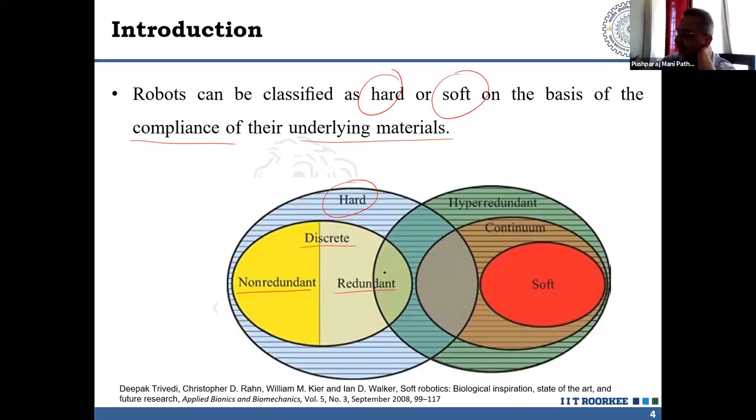To introduce this concept, I first have to define degrees of freedom. When we are talking about robotics, the first and foremost thing that appears is the degrees of freedom. It is the number of independent variables needed to specify the position and orientation of an object in space. I'm talking about the general degree of freedom.

For example, say there is an object in space. If I want to specify this object, the specification can be with respect to a coordinate system, say an XYZ coordinate system. With respect to this coordinate system, I can specify the position using the CG of this object, so I have three variables: XCG, YCG, and ZCG.

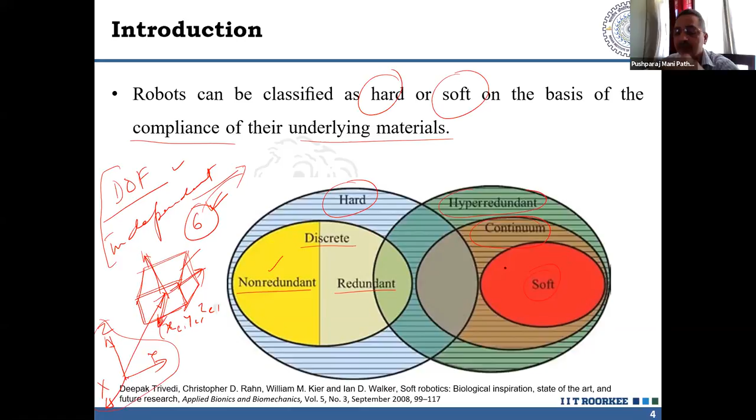This figure will give you a little more idea. Suppose I have a robot with just 2 links. I have a motor attached here to drive this link, and a motor attached here to drive this link—so I have a 2-link manipulator. Now when I actuate these joints, these may be the trajectories you are seeing, the possible positions.

Now I increase the number of links. So this is my first link, second link, third link, fourth link, and this is my fifth link—I've increased the number of joints. You can see that the motion of the robot has become serpentine. And if I increase the number of links to a very large value, the shape the robot gets is something like a continuum robot.

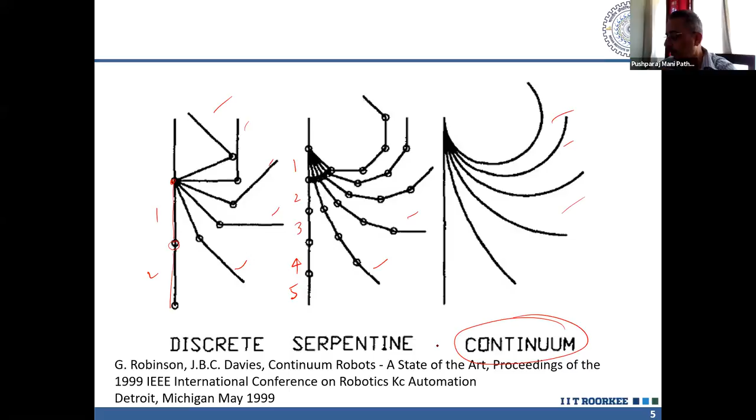So this is how, by increasing the number of links, the things evolve—we move from the discrete to the continuum domain.

A soft robot is inherently compliant and exhibits large strain in normal operation. The most commonly used hard robots are kinematically non-redundant, as I explained. These robots are typically used in well-defined environments in which they repeatedly perform prescribed motions—you might have seen such robots in workshops and industries.

Now, these hard robots are designed such that they have very large stiffness. If the stiffness is large, the deflection is going to be low. And if you want things to be accurate—the trajectory tracking of your manipulator to be accurate—you want a very small amount of deflection in the arm of the manipulator.

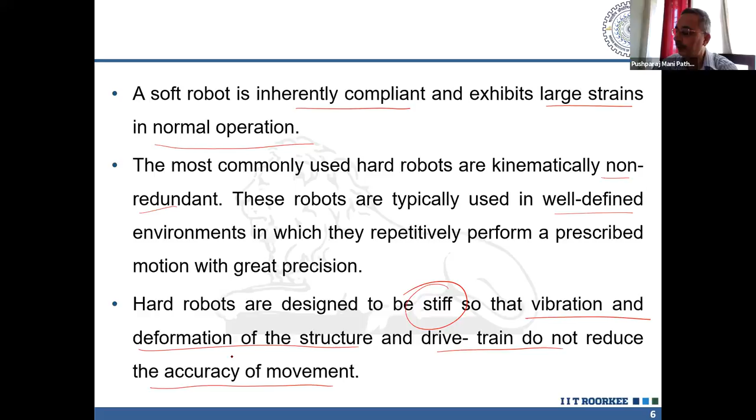Hard robots are designed to be stiff so that vibration and deformation of the structure and drivetrain do not reduce the accuracy of movement. Hard robots are hyper redundant when the number of joints is very large, and hyper redundant robots have the potential to work in unstructured environments and provide high dexterity.

You may ask why we require a hyper redundant robot. Suppose you have some obstructions, something like this. If you have a hyper redundant robot, it can overcome these obstructions. If you have more links, more configurations of the robot are possible, so these obstructions can be avoided. That is the usage of a large number of links.

I'll explain with a simple figure the capabilities of hard and soft robots. For the hard robot, if you see this figure, you have an obstacle here. If I want my manipulator's tip to reach over there, it goes in this form: this could be a joint angle, this could be another joint angle, and this another joint angle which the motor rotates to these links. Here the probability of hitting this obstacle with the robot is very large.

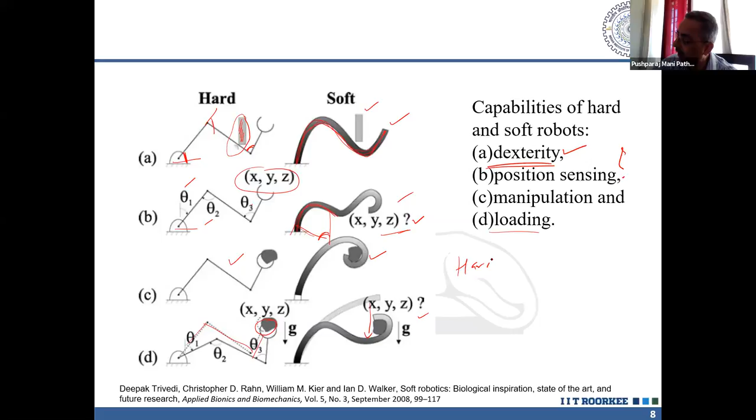The other problem is that of loading. In case of a hard manipulator, if there is a payload taken by the end effector, there is going to be a certain amount of displacement in the manipulator, so the links may move from here to some other configuration because of the load. But in case of a soft manipulator, this displacement is going to be large. As I said, in case of hard, stiffness is very high, and in case of soft, stiffness is low, so we are compromising on stiffness. Here accuracy is high, whereas here accuracy suffers. That is the trade-off being done.

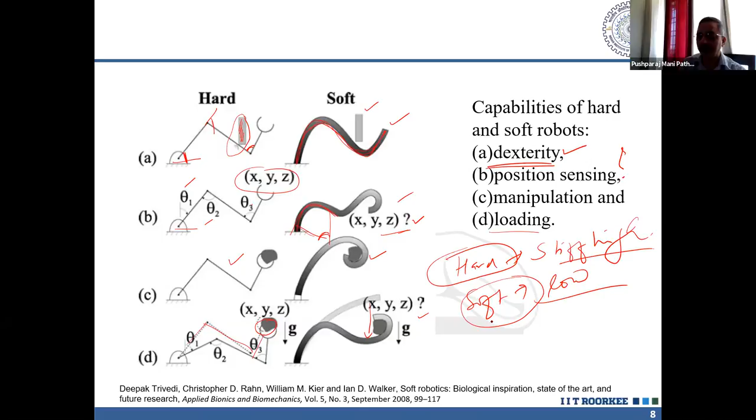Fine, I think I have explained these things, so I can skip these slides.

Soft robots have distributed deformation with theoretically an infinite number of degrees of freedom. That is there with the soft robot because their deformation is distributed. Each point, since it's made of infinite number of points theoretically, to describe those infinite points you need infinite coordinates basically.

This leads to the hyper redundant configuration space, where the robot tip can attain every point in the three-dimensional workspace with an infinite number of robot shapes and configurations.

Then the question arises: why do we go for soft robots if they don't have good accuracy? Soft robots actually have an additional feature: they generate little resistance to compressive forces, and therefore they can conform to obstacles. Conform to obstacle means if some obstacle is there, it can take its shape, it can deform. The advantage of that is they can carry soft and fragile payloads without causing damage to it.

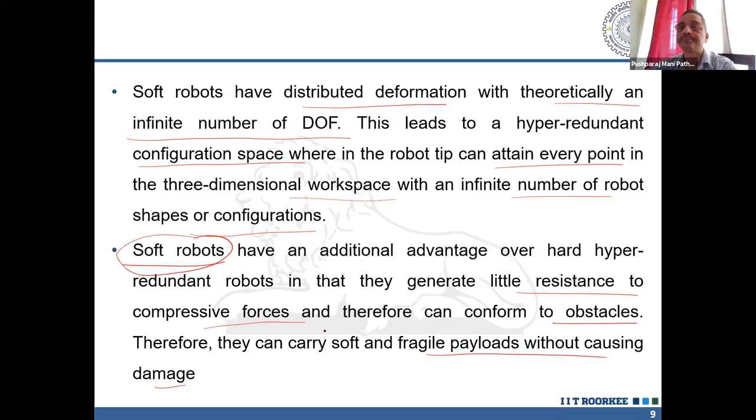The actuators of soft robots are typically integrated into and distributed throughout the structure. In case of hard robots, our actuators are actuated at the joints - we have motors fixed at the joint to actuate these joints. But in case of soft robots, they are usually pneumatically actuated, so the actuation is distributed in that case.

Often the actuators make up most of the structure. Soft robots fall into a class of systems termed under-actuated, because unlike hard robots, there is not an actuator for every degree of freedom. Other degrees of freedom may be influenced by the actuators, but many degrees of freedom are not controllable. Sensing and controlling the shape of soft robots is challenging, as I explained earlier, and since their structure is a continuum, exact measurement of shape and tip position is difficult.

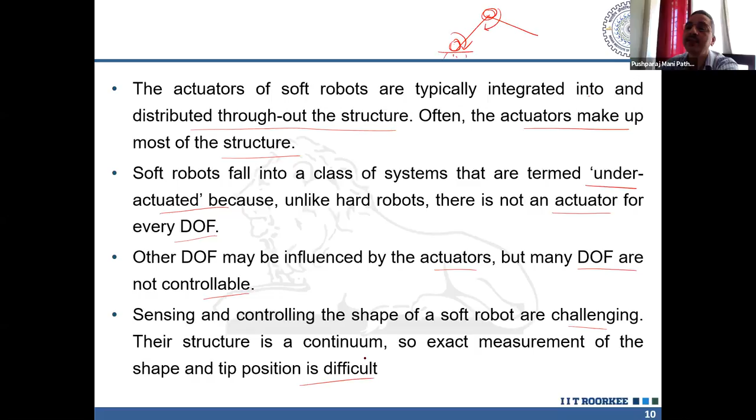Now, assuming a rigid robot, joint position can be processed by the forward kinematics. I hope all of you are aware of what is forward kinematics and what is inverse kinematics.

So, if I have a simple 2 degree of freedom planar manipulator with two links - you have a motor here fixed to the ground actuating the first link, and then a motor fixed on the first link actuating the second link. Say this angle is theta1 and this angle is theta2, and this is the tip of the manipulator, then I can find out this tip position given the joint angles.

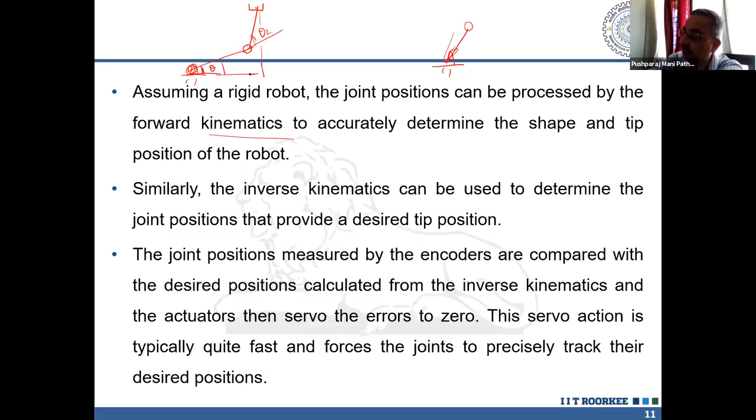As I was telling you, I can find out this angle is theta1. If this length is L1 and this length is L2, then this total angle is going to be theta1 plus theta2, because if I draw a parallel line here, this angle will also be theta1. So the x tip and y tip: x tip I can find as L1 cos theta1 plus L2 cos(theta1 plus theta2), and y tip as L1 sin theta1 plus L2 sin(theta1 plus theta2).

So what I'm saying is that forward kinematics means if you know the theta1 and theta2 values, then you can find out x tip and y tip. This is what is called forward kinematics - that for a given joint configuration, we can get the tip positions.

And what is inverse kinematics? Inverse kinematics is that you are given the x and y. Now the question is, in forward kinematics, how do I know theta1 and theta2? If you are using simple toy motors, they have a sensor called the potentiometer put into it, and with the help of the potentiometer rotation, you can find out what that joint angle is.

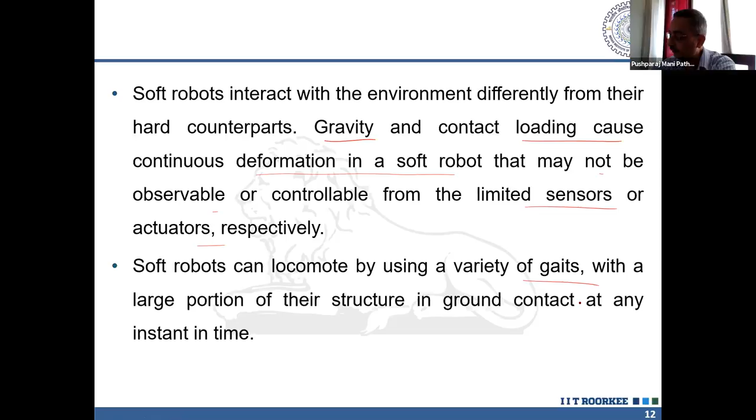With this brief introduction, I'd like to give you an overview of how people have progressed in this area of the bionic manipulator, and how they have tried to mathematically model its kinematics.

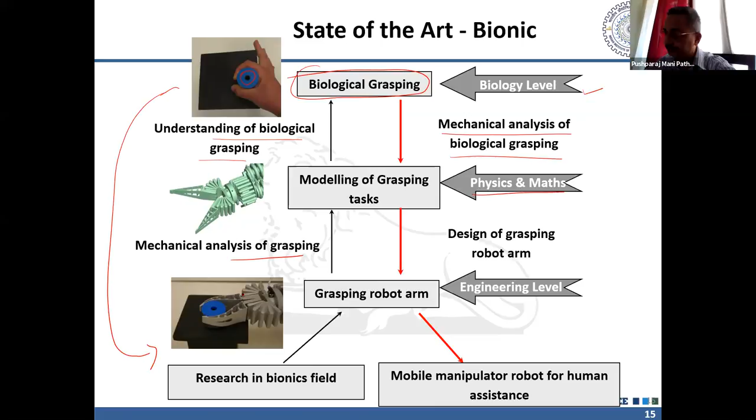There are several application domains for humanoids. You can see the bionic bird - you must have seen it in the movie Uri. Its use had been demonstrated, and there are many people working in this bionic area currently. The several application domains are humanoids, animal-like robots, exploring unknown planets, tasks in hazardous environments, home robots, toys, artistic robots, and so on. These are bionic actuators which have been used to replicate human muscles.

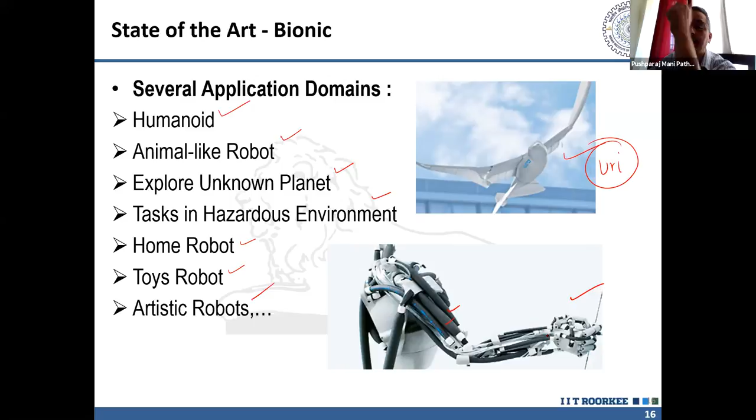The state of the art could be based on the degree of mobility, degree of steerability, degree of maneuverability, and degrees of freedom and redundancy - that is redundancy and hyper redundancy.

First let us look at the terrestrial mobile robots. They could be classified as wheeled mobile robots, which could be of the rolling type, where you have omnidirectional wheels put on the robot, or it could be the tracking type, having a tank-like structure.

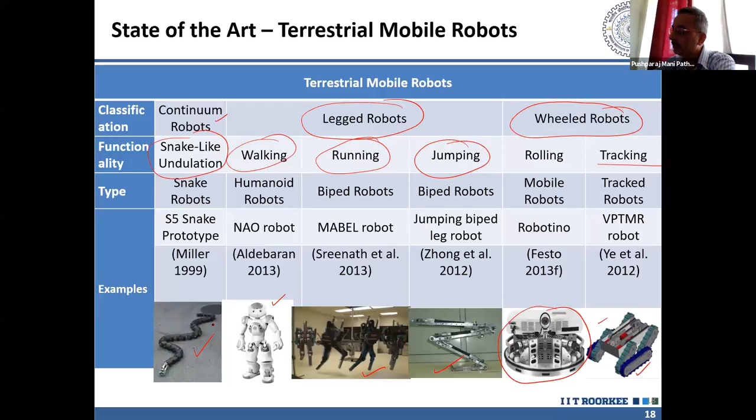Then we know about legged robots also, where they could be either walking robots, running robots, or jumping robots - all three types of legged robots are possible. Then comes the classification of continuum robots, which I was talking about, the ones with snake-like undulations, as you can see here. So these are the three types of terrestrial mobile robots.

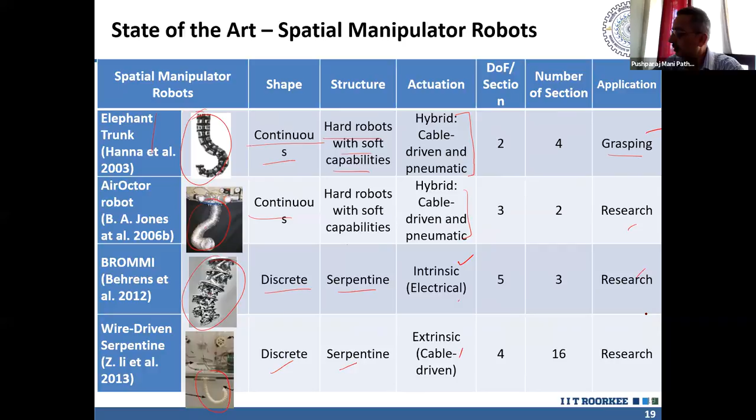So we have seen the manipulator example, we have seen the mobile example. If we combine both of them, then what we get is the mobile manipulator example. That is, apart from the base motion, you have the manipulator also.

So if you look at industrial robotics, then we have many examples. For example, KUKA KR5 or KR6, where this manipulator base can move along a slider. So there is a motion or mobility to the base, and the manipulator can have a motion. Or we could have the pathfinder, or agriculture robot is also there. Large scale pipe manipulation is there. Robots used in construction, hazardous application, and the rescue robot. So you have basically a mobile base, and you have a manipulator mounted on that.

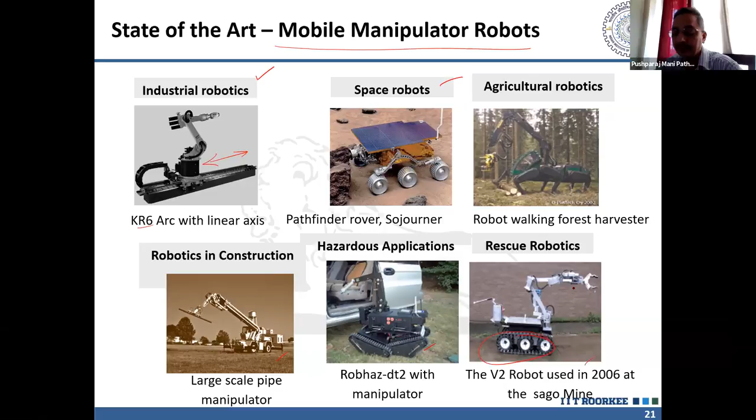So as we have been talking about the continuous manipulator, you can have the continuous arm on the mobile base. This is OctArm. Then you could have this continuous manipulator on the mobile base, which is there in the Robotino XT, continuous soft one - I'm going to talk about this example. And then you have OC robotics, this one, the discrete hard one, and elephant trunk like robot, discrete hard again.

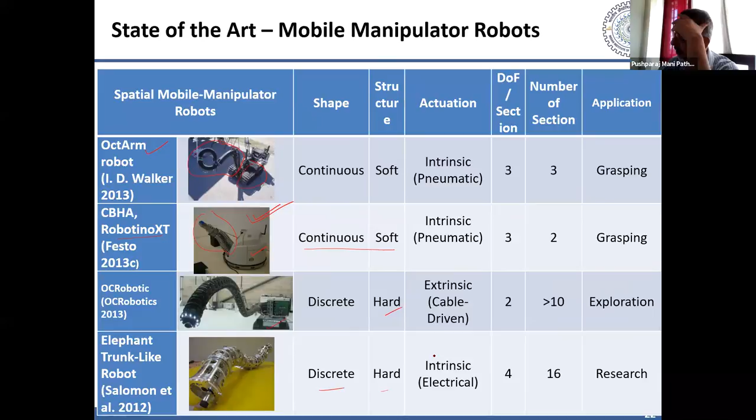So coming to the modeling method, now the question arises, how do we model these robots? The soft robots. And why do we want to model? We want to model because we want to predict the behavior of the robots in different conditions. There are different modeling methods.

So approach of constant curvature robot was given by Webster and Jones, and many people worked on different aspects of it. One is the modified DH, that is the Denavit Hartenberg robot, Denavit Hartenberg notation. So those who have even a little background of robotics may be aware of this DH notation. Basically it's a way of representing the joint parameters. That is what we call the DH notation - joint parameter and the link parameter basically. So there are four parameters.

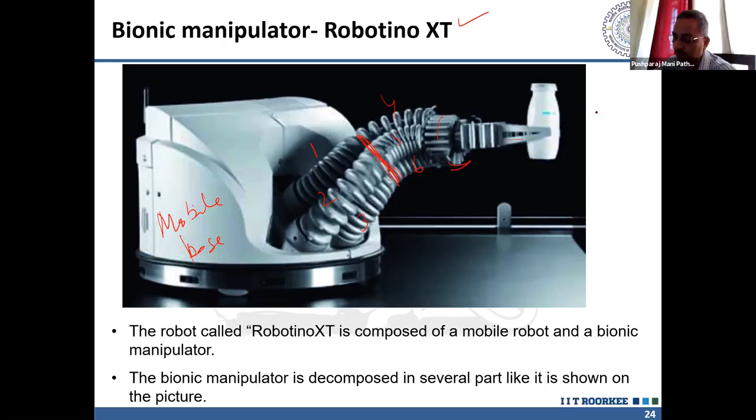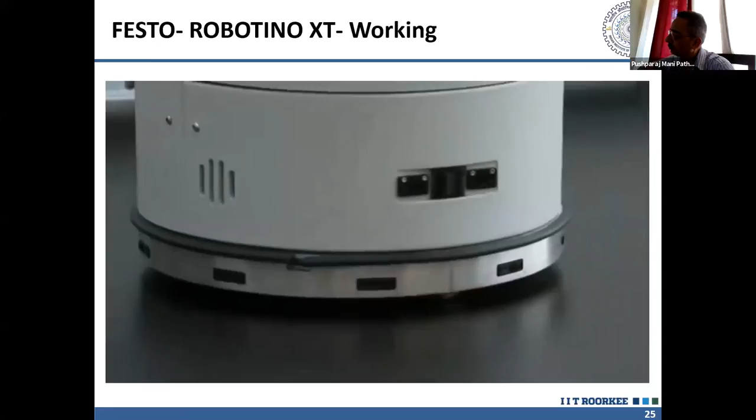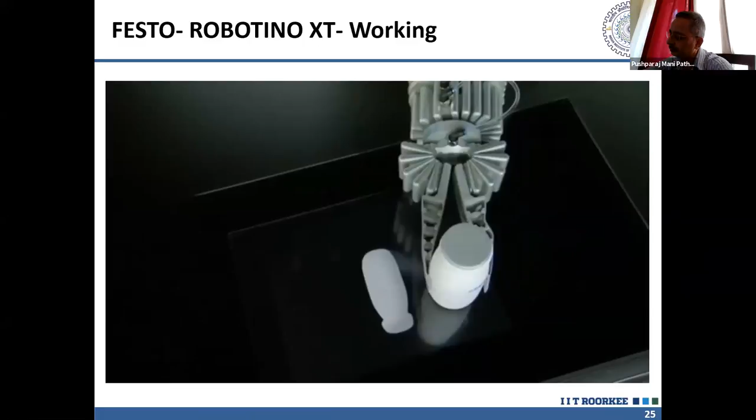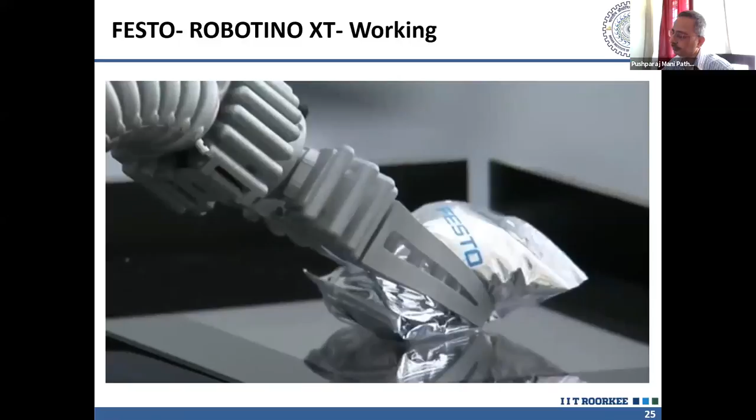So this is how this robot looks like. Let me show a little demo for you for this. So this is how it looks.

So this is how its internal construction looks like. Here you are seeing these are the servo valves. Here there is a compressor in this one, and compressed air comes through these servo valves, and there are tubings, some of which you are able to see. So the different sections are actuated with the help of these tubings, through pneumatic pressure.

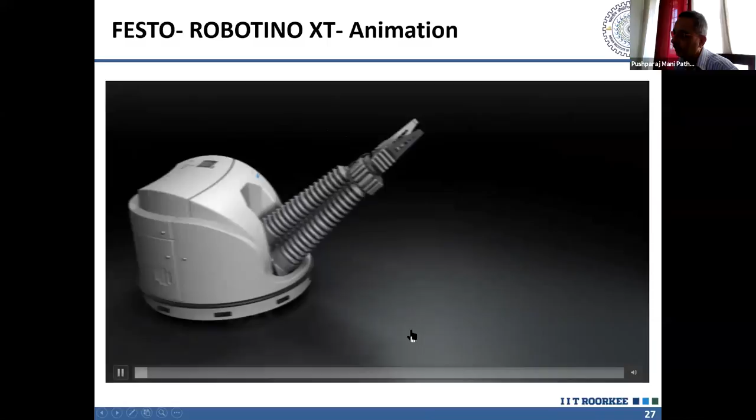You can see some very thin wire which has been put here, and these wires are nothing but linear potentiometers, which could be used to measure the length of these sections. And this is your wheel for the motion of the omnidirectional wheel for the mobile base. So if you want to look at the internal structure, this is how it is for you to understand it better.

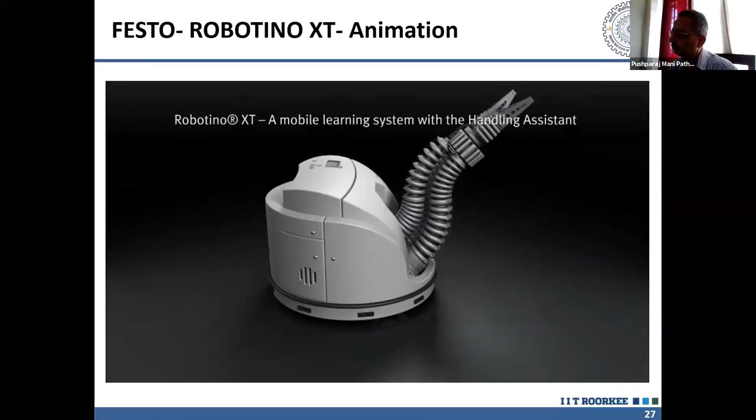Yeah, so these are the three motors, 1, 2, 3 here, and these motors actuate the wheels.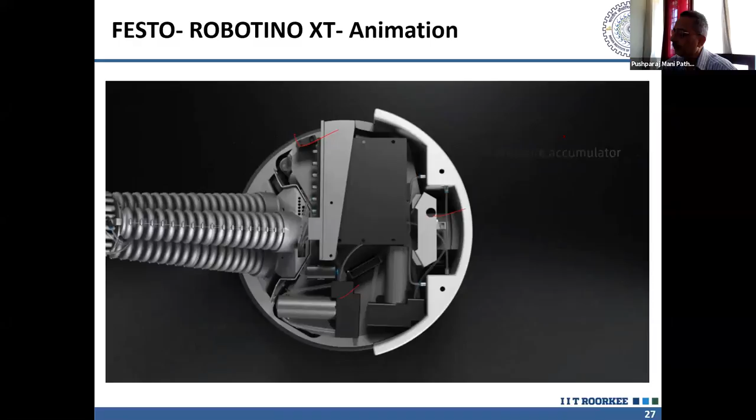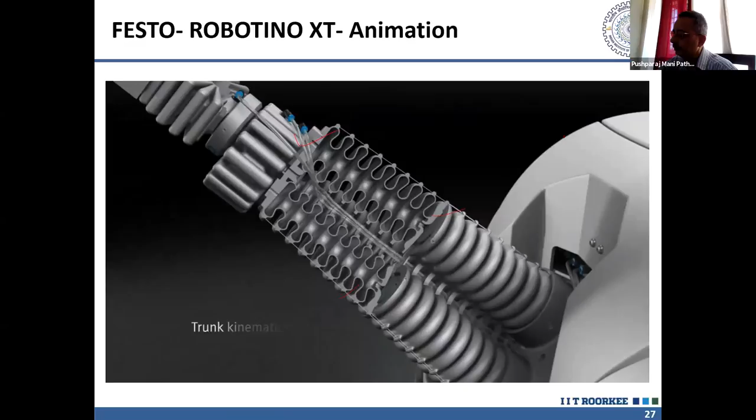Yeah, this is the piezo valves. This is how the internal structure looks like. So when you actuate, the air actuation is there. This is how the rotary actuator works for orienting the end effector, and this is the compliant gripper. You can see that it can grasp the object very nicely.

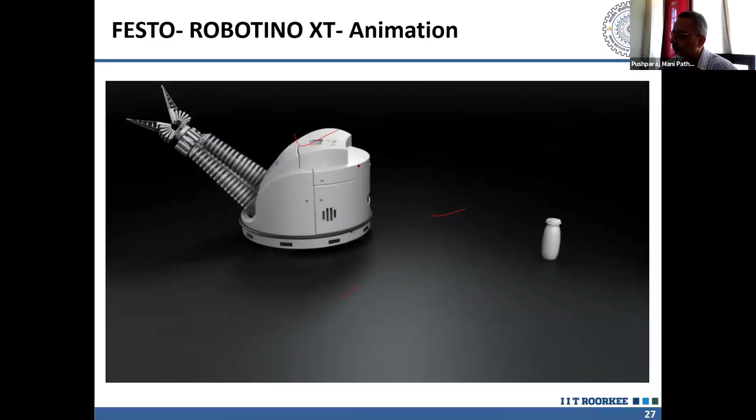So the question is, what will be the forward kinematics if I look at it? When I'm pneumatically actuating the different sections, the length is going to change. This section length and this section length are going to be changed. So if I could measure these lengths, then maybe I'll be able to get the tip position of the manipulator.

So let me give the description, as I think I have explained this. This robot is called Robotino XT, and it is put on the mobile platform called Robotino. It's a product of Festo, Germany. They are pioneers in bionic manipulators, various types of which they have been making. It's a hyper redundant continuum robot, called Compact Bionic Handling Assistant, CBHA. There are two sections with 3 tubes per section, as I told you, one rotation part and one compliant gripper. It's a pneumatic actuation with limited extension.

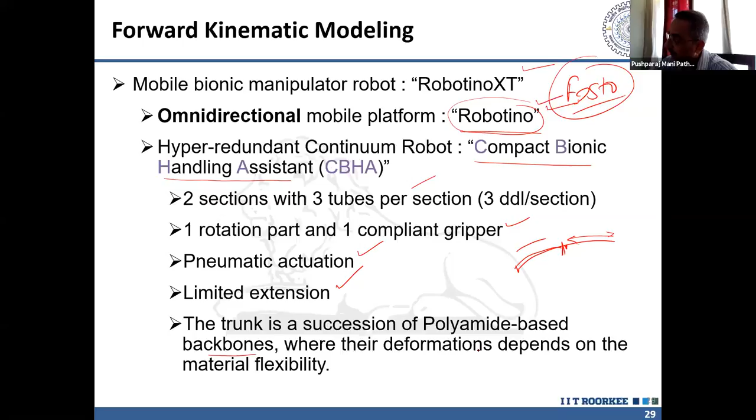The backbone, we assume, has very limited extension, so most of the workspace comes from the deformation in the tubes. The trunk is a succession of polyamide-based backbones, where their deformations depend on the material flexibility. So these could be the assumptions.

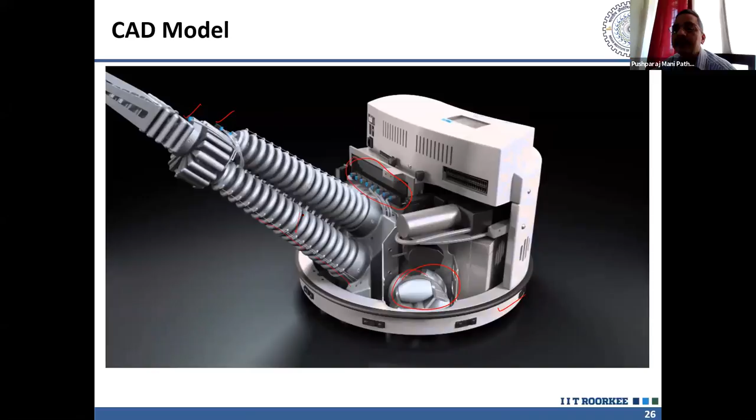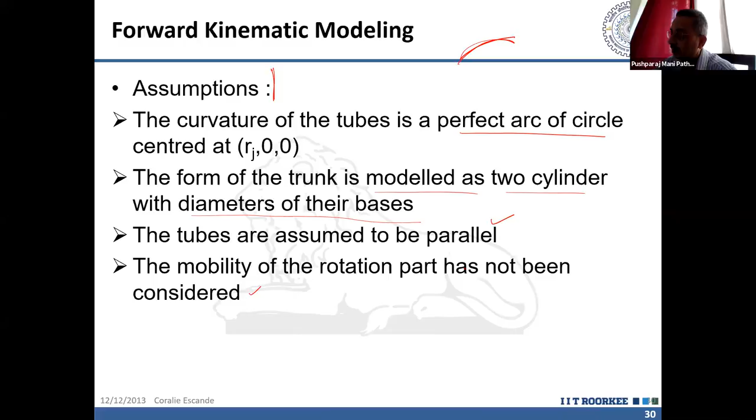First, the curvature of the tube is a perfect arc of a circle, as I talked about these assumptions earlier. And the form of the trunk is modeled as two cylinders with the diameter of their base. Although you can see that these diameters are changing, appearing like a frustum of a cone, to simplify the analysis, we assume these are cylinders. We may assume it's a frustum of a cone also, but then the analysis would be complicated. So the tubes are assumed to be parallel, and the mobility of rotation has not been taken into consideration, meaning we have not considered the rotation degrees of freedom at the end effector.

So this is the result of those assumptions, as I was saying. We can assume that this is of diameter D1, this is of diameter D2, okay like this. And these are the lengths of the tubes, basically. You can see L1, this is one which is there in the back, not seen here. That length is L2, this is L3, L4, and again the one in the back, that is L5, and this is L6. So these lengths are synonymous to the joints, basically the joint angles, which we talked about in case of the rigid manipulator.

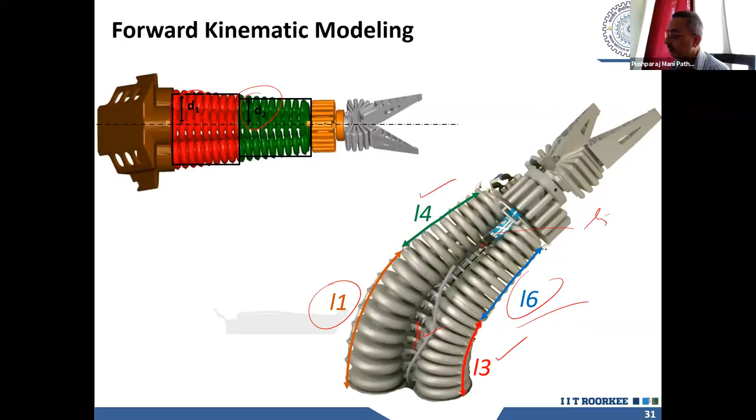So the forward kinematic model is basically that we are interested in finding out where my tip goes, that is finding the tip position. So what we do is assign various frames. Say at the origin of the first section, we have a coordinate system here. At the origin of the beginning of the second section, I have got a coordinate system. At the beginning of this rotary section, I've got a coordinate system like this. And then I have got an origin for this one, a coordinate system here. Now we can do the transformation from one coordinate system to another to reach the tip.

But as I said, there is a problem here because our tubes can deform, basically. So what I'm saying is that the forward kinematics is that the tube lengths, basically, are the joint variables synonymous to the rigid manipulator. And for given these tube lengths, you may ask, how do we measure these tube lengths? So these, as I said, are the linear potentiometers. So I can have these values of the tube lengths.

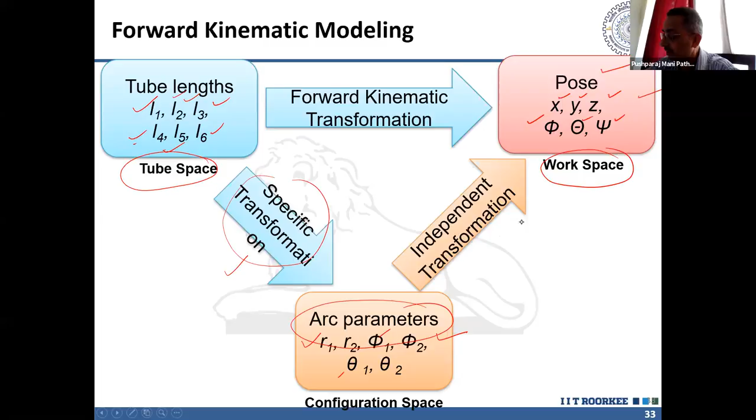So basically, for the two sections, we have these six parameters, the arc parameters. And once I have got the arc parameters, then I can do a transformation to get the xyz position, as well as the orientation of the end effector. So let me call this a specific transformation, and this the independent transformation here.

As I said, we assume that the curvature of the tube is a perfect arc of a circle centered at this value rj, 0, 0. This assumption is considered when there is no load. Remember, if there is a load at the end effector, then we cannot consider the tube to be deforming in the shape of a perfect arc of circle. This assumption is considered when there is no load on the gripper, gravity effect is neglected, and the tubes are parallel and their diameters are constant. So we are making these many assumptions in order to simplify our analysis.

And with these assumptions, if I do that, then I have a simple equation. You may be knowing S is equal to R theta, that is the arc length is equal to the radius of curvature of the arc times the included angle. So this gives you the arc length, basically. Using this equation I can get my theta. So I can get this k value, that is my arc length... reverse of radius will give me my curvature, and once I know the curvature and I know the arc length, I can get the included angle.

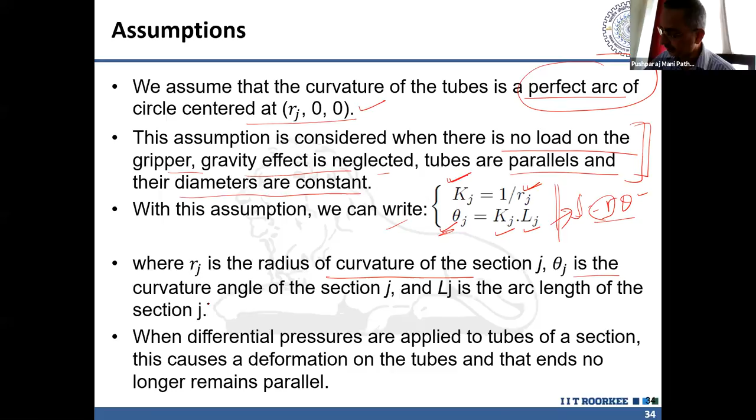So here Rj is the radius of curvature of the section, theta j is the curvature angle of the section, and Lj is the arc length of the section. And when differential pressures are applied to the tubes of a section, this causes a deformation on the tube, and thus they no longer remain parallel.

Coming to the forward kinematic model, what I'm interested in finding out is this transformation from 4 to origin. This 4-to-origin transformation can be given by this transformation matrix multiplication.

I'm sorry, you need to have some previous background of robotics. Do you have this background? Anyone? Most of the people are new only, sir.

Okay, this transformation matrix is something like this. It's a 4 by 4 matrix, and the last row is 0, 0, 0, 1. Here you have the position variables, px, py, pz, and this 3 by 3 matrix represents the orientation. This whole 4 by 4 matrix is what is called the transformation matrix.

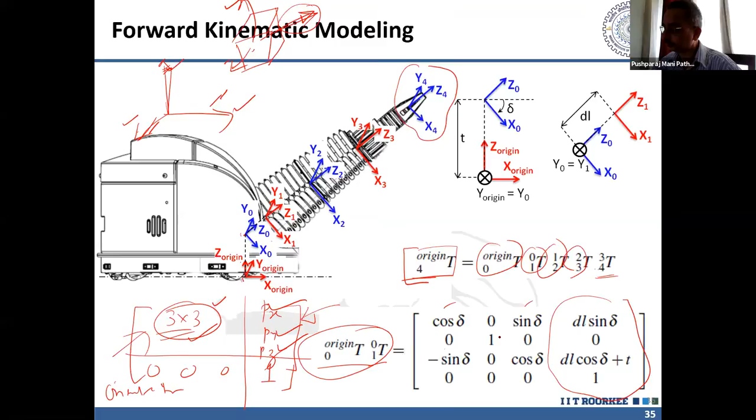Then we have the independent transformation, from arc parameter to position and orientation. Let me have this as my x, y out of plane of paper, and this is z, this is arc length, this is the included angle theta. Then I can write what is my position in the Cartesian space.

This complete length is r here, and this is also radius, so this length is going to be r cos theta. If I subtract r minus r cos theta, I get the x coordinate. So r minus r cos theta is my x coordinate. It is in this plane, so its y is going to be 0.

What is the z coordinate? It is this distance basically, so this is going to be r sine theta. This way, from the radius of the arc and the included angle theta, I can get the Cartesian position x, y, z.

Suppose this arc I rotate about the z axis by angle phi, then this Rz(phi) I can write. This is the rotation matrix for rotation about the z axis. I can write it like this.

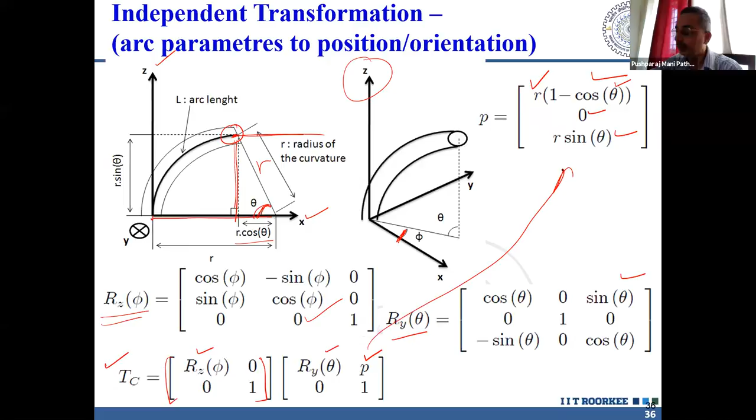Okay, if I have rotation about y by theta, then my matrix, the transformation matrix will be this matrix, that is rotation about z, and this is rotation about y, and this p value, where this is your p basically. So this way I can multiply those and I get this as the transformation matrix.

This is the independent transformation, that is arc parameter to the position and orientation, and I want to orient the end effector same as that of the initial value I want to take as the base. So some further transformation can be carried out, and that will be giving me this value.

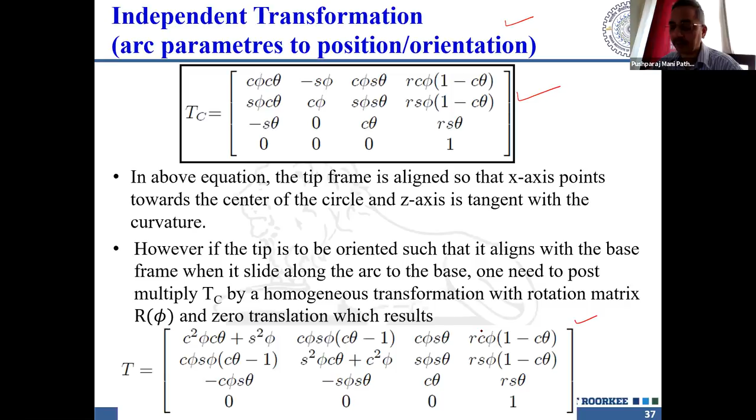So the forward kinematics is from arc parameter to position and orientation. Then for the two sections, this equation I can write for the two sections. Basically this is for section 1 and this is for section 2. So I can write these two equations for the two sections, and this is how tip position for x1 y1 z1, and this is for x2 y2 z2 could be there.

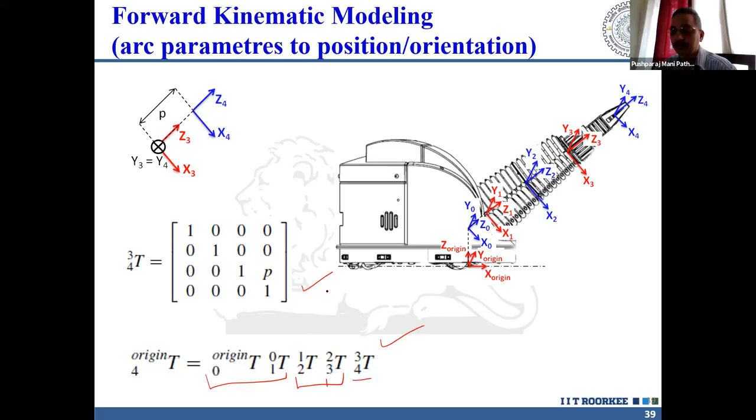Here I have defined this earlier, and these two I have worked out just now, and this one with the p displacement can be just given like this. So I have this transformation, that is from arc parameter to the tip. Then next comes the tube length to arc parameter specific transformation.

Here again you see that I have one tube here, a second tube here, and a third tube here. These tubes have arc length r1, say at center it is r, and these are the locations, say this r, the center backbone is at an angle phi, and these tubes are at an angle further phi 1, phi 2, and phi 3.

Then I can carry out these simplification equations, that is ri is equal to r minus d cos phi, and this is for the length where this length is the average summation of all three potentiometer readings basically. So this way I can do these simplifications.

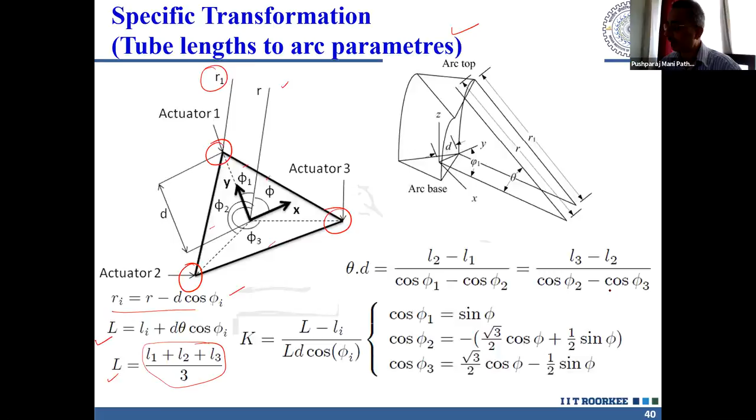So with this simplification I can get the values of the arc parameter basically. Here the arc parameters are basically the reverse of this radius of curvature of arc, this k value, and this is the included angle. So for given potentiometer readings I can find out k and phi value.

So for the two different sections I can have phi 1, theta 1, and r1 for the first section, and phi 2, theta 2, and r2 for the second section.

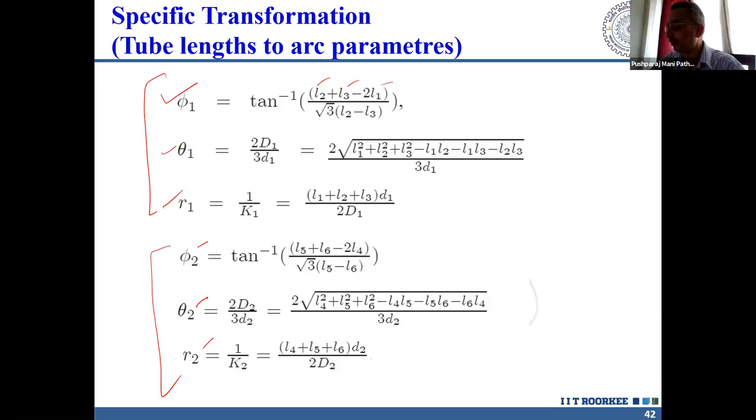Basically what I have done is that for the given tube lengths I have found out my arc parameters. So from tube lengths I have the arc parameter, and from arc parameter to Cartesian coordinate we have already found out. So that way we can complete the full forward kinematic model of this one, for the tube lengths we find out the arc parameter, and from arc parameter we can find out the pose.

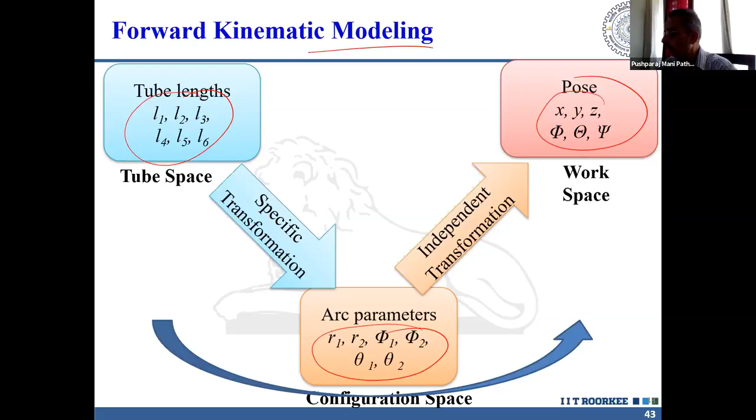This way we can try to work on the forward kinematic model for the continuum manipulator. So I'll be moving a little fast here.

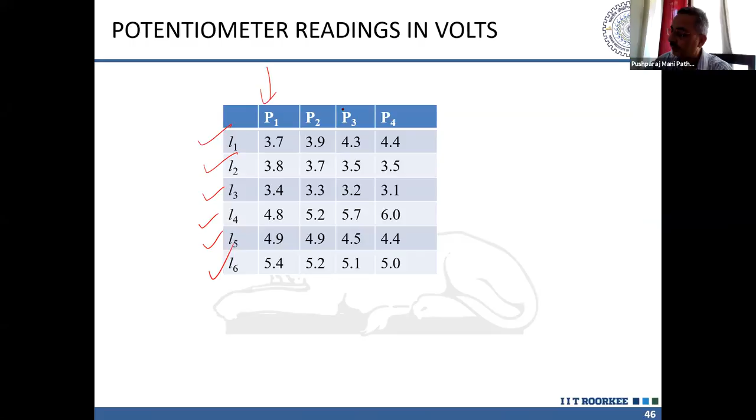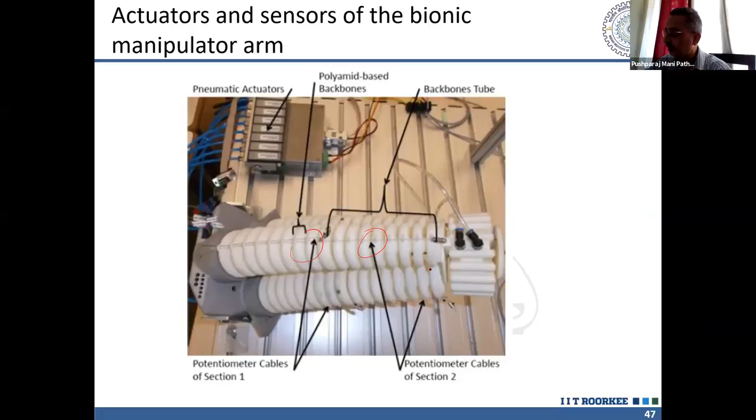So potentiometer readings, 4 sets of readings we had. And I have already explained to you these potentiometers for the different sections. Then what we did is that we put 2 cameras in order to find out the XYZ tip position over here, so with the help of 2 cameras, we tried to find out that.

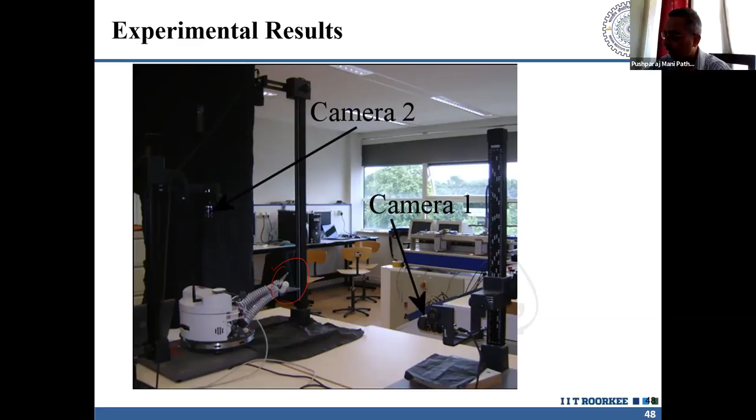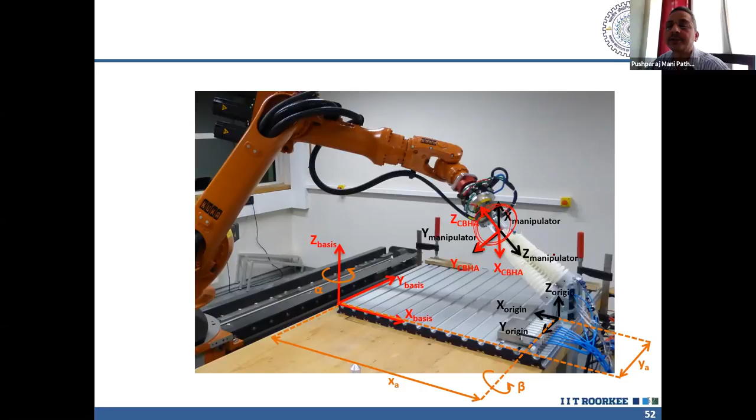To make things precise, we attached the tip of the robot to a KUKA KR5 robot, because if you take camera readings, you have to process that camera data in order to get camera images and the XYZ coordinate. Another way of getting the XYZ coordinate is using the robot end effector position, which can be obtained easily. That value could be taken, and then the various transformations could be obtained. So this is how these things could be done.

Various calibration was done, and the values were calculated and plotted. You can see the XYZ tip values here: model before calibration, model after calibration, and position from the KUKA.

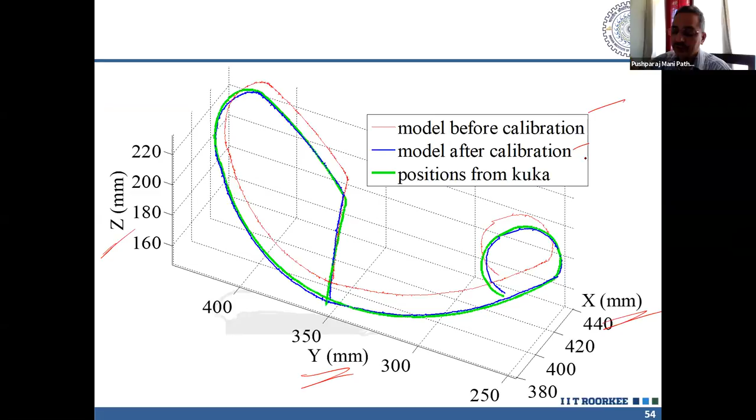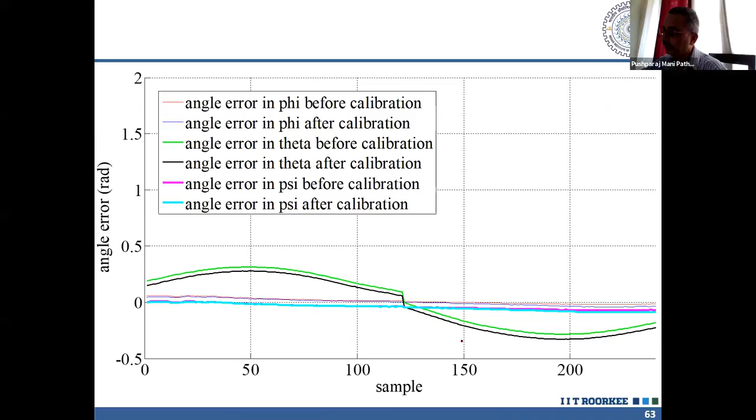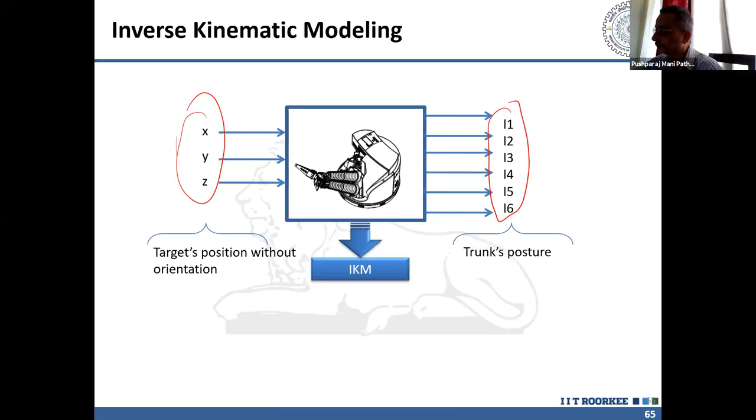Then the inverse kinematic model - whatever I discussed till now was only about the forward kinematic model. We can have the inverse kinematic model, which means if I'm given the XYZ coordinate, I can find out what my potentiometer readings are going to be. Here there are many sources of error.

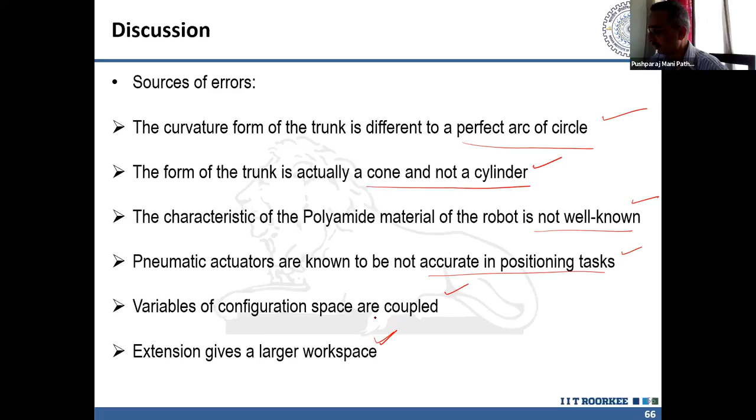The curvature form of the trunk is different from a perfect arc of circle - this is a source of error. The form of the trunk is actually a cone and not a cylinder, as I discussed with you, but for simplification we assume it to be a cylinder. The characteristic of the polyamide material of the robot is not very well known. Pneumatic actuators are not accurate in positioning tasks, and variables of configuration space are coupled. Extension gives a larger workspace - we assumed extension is not there, but although there is going to be some extension, so that is going to be a problem.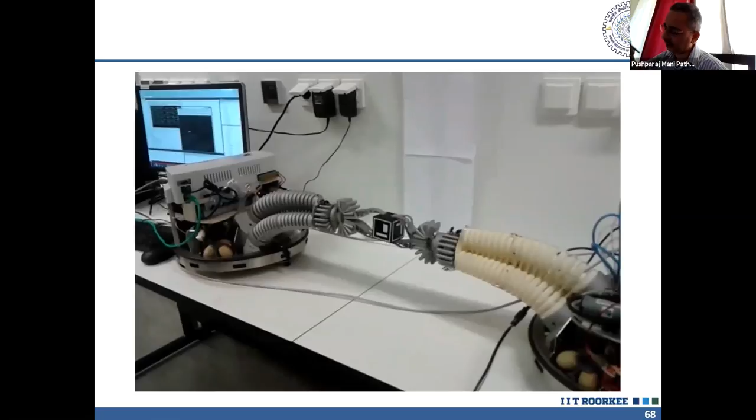Then we did some work on the cooperative behavior of two such manipulators handling a common object, as you can see over here. So the cooperative behavior has been discussed, although it's a very simple task - just bringing it down and taking it up.

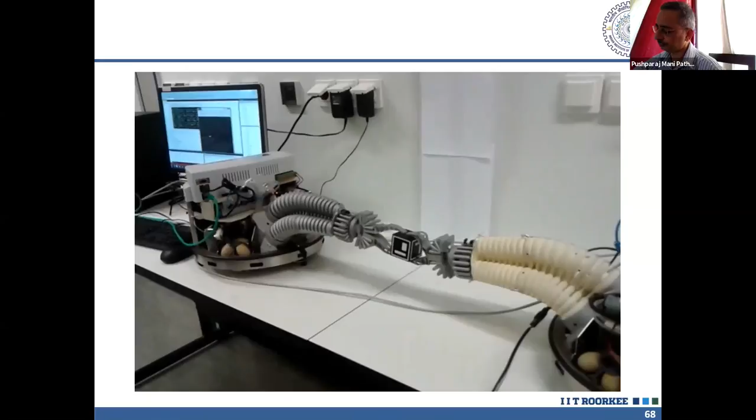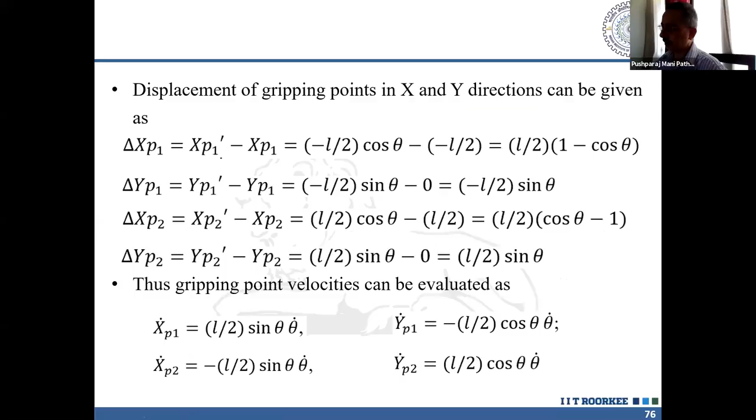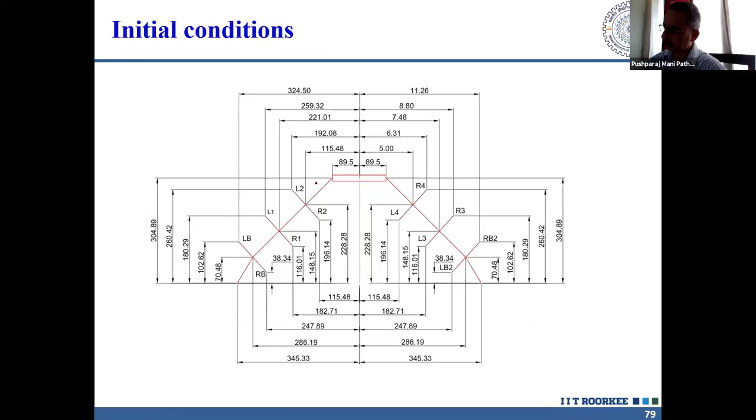Then there's the modeling for the cooperative behavior for the planar case. I won't explain this in much detail. This is the initial configuration basically - you have the first robot here, the second robot here, and here you have the object.

Some simulation results. Then the other type of bionic manipulator which I want to quickly go through is that of the hyper redundant snake robot. We did some work, and we are continuously doing it. This work is part of a project which we are doing with Korea.

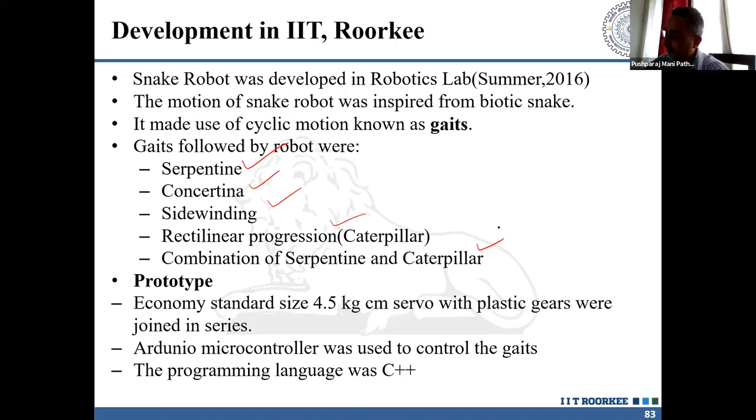You know that the snake moves in different ways. These ways we call gaits, and these gaits could be serpentine, concertina, side winding, rectilinear progression, or a combination of serpentine and caterpillar.

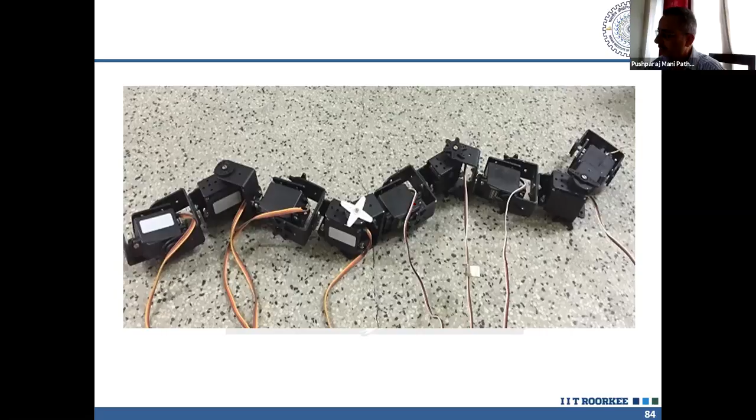We made some initial work on this robot with the help of the Futaba motor. You can see these are the various gaits - this is concertina, this is the serpentine, this is the side winding, and this is the caterpillar motion.

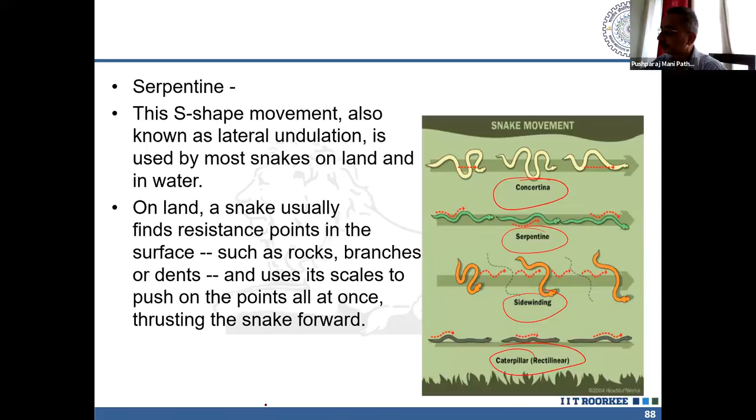This is how the side winding motion takes place. The snake finds few resistance points in the environment, and may use a variation of serpentine motion to get around. They contract their muscles and flex their body in side winding to create an S shape, which has only two ground points of contact with the ground. When they push off, they move laterally.

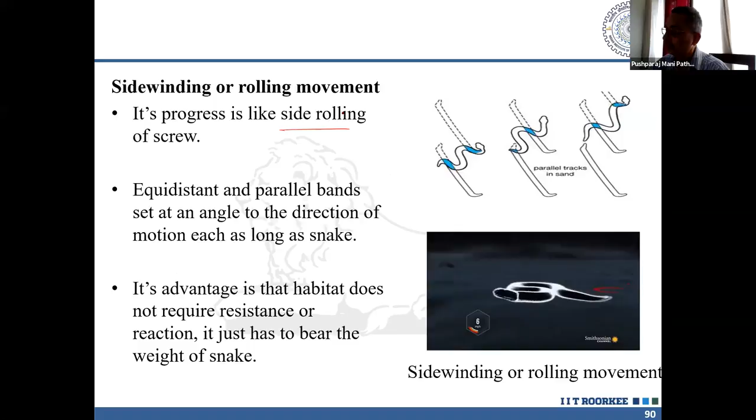Then this is the side winding one - here you can see it progresses like the side rolling of a screw. And then you have the caterpillar one - this is another gait, the rectilinear or caterpillar one.

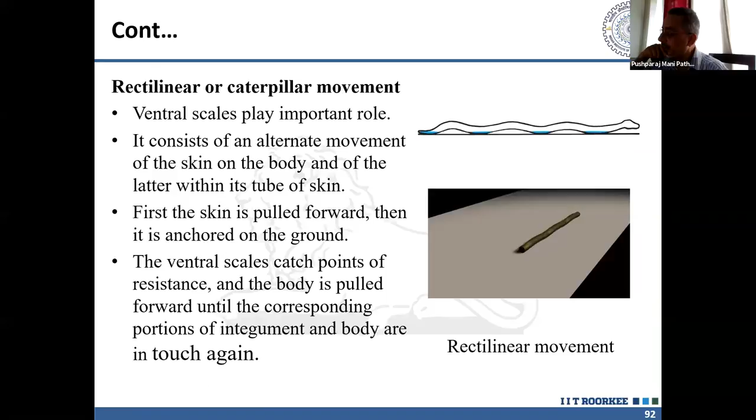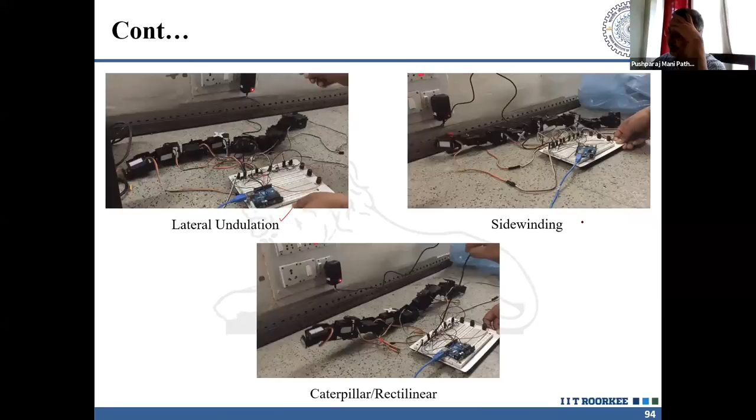Concertina is another one where the snake extends its head and the front of the body along the vertical surface, then finds a place to grip with its ventral scales. So we tried to replicate these gaits: this is the lateral undulation, this is the side winding, and this is the caterpillar motion.

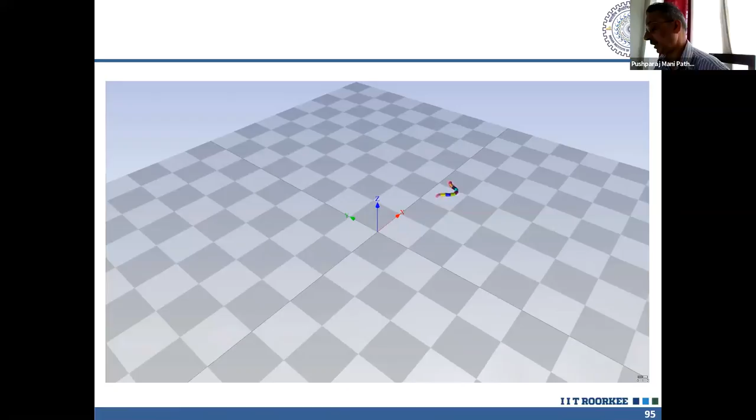Of late, we are working on the soft part of it, making a soft robot. We have prepared a dynamic model of it, a bond graph based dynamic model for the soft snake robot, and we have simulated and animated it.